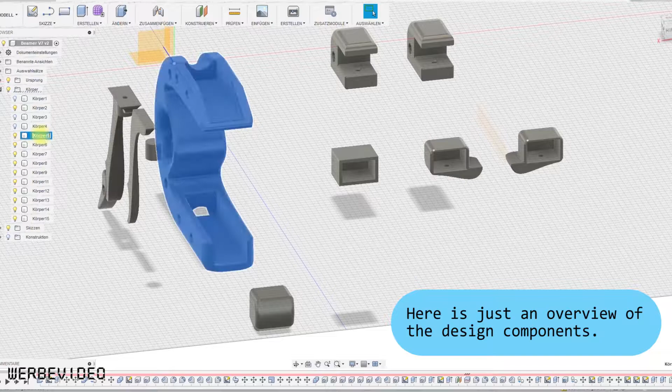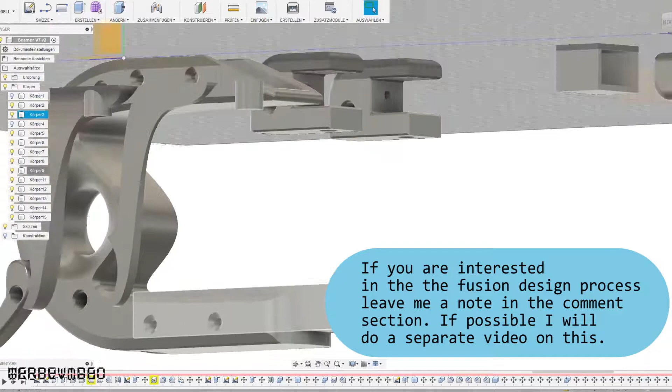As a design study, I chose a projector stand. The aim was to find a design that combines wooden elements and 3D printed components working together smoothly. In addition to functionality, I wanted to use an interesting shape. For the design of the workpiece I used Fusion 360, and for slicing, the software Cura 4.0.

I roughly sketched the design with a pencil and oriented myself to the dimensions of a typical projector. The design should not require too much space on an office desk. The stand for the projector should be pivotable and also as lightweight as possible.

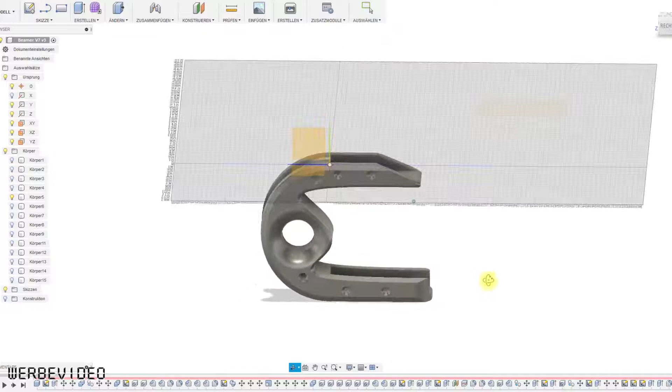For the wooden elements I used 18mm plywood, combined with 3D printed parts made of PLA and PETG.

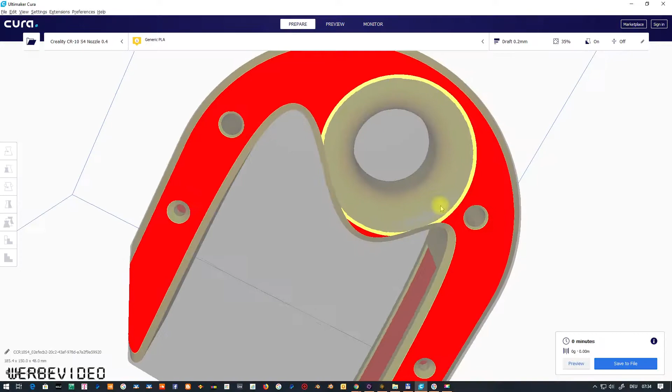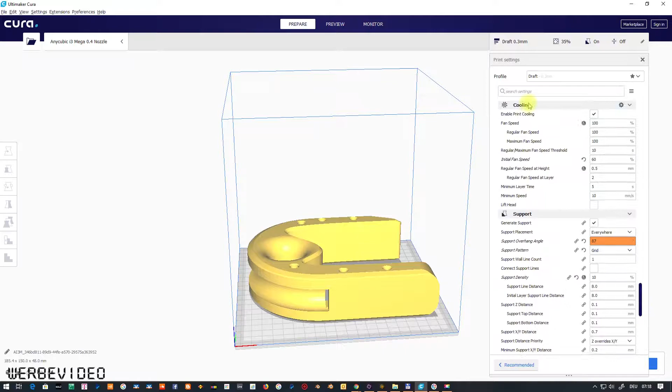The print with PETG requires a nozzle temperature of about 220 degrees Celsius and a bed temperature of around 80 degrees Celsius. But keep in mind, the settings can vary between filament producers.

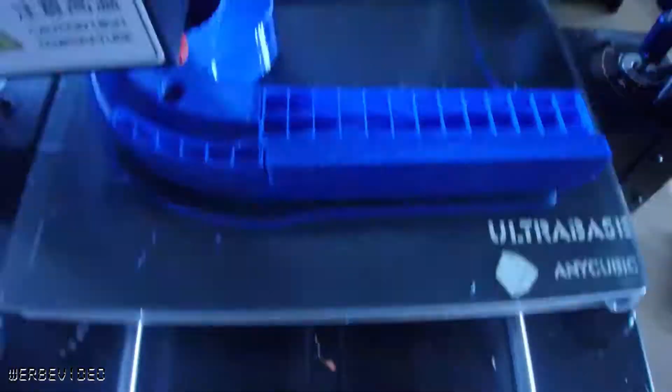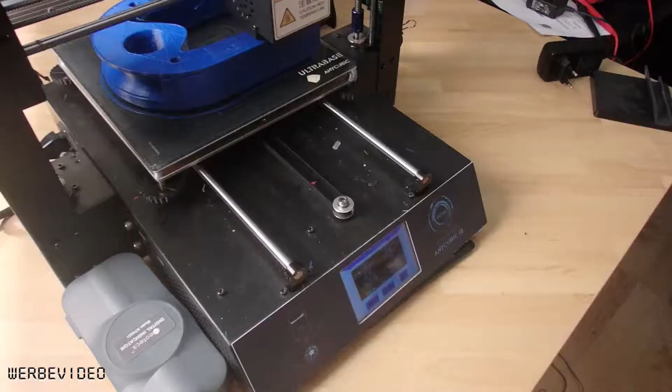To print PETG, I used the Anycubic i3 Mega, which is better suited for higher temperatures and has a smaller print bed. In order to find the correct temperature for my printer and the PETG filament I used, I previously printed a heat tower. As a result, the optimum temperature was between 220 and 225 degrees Celsius.

The PETG components printed in blue. For printing with PLA, I used black colored filament.

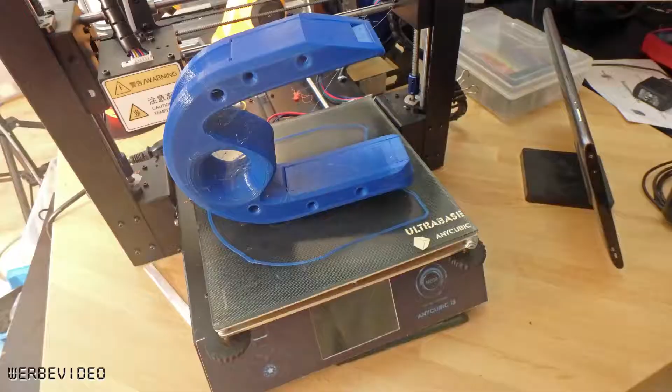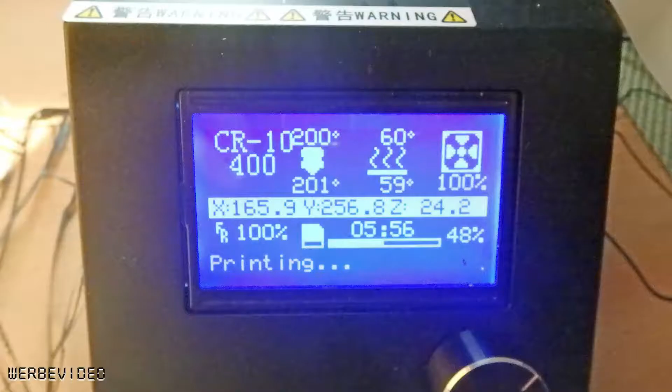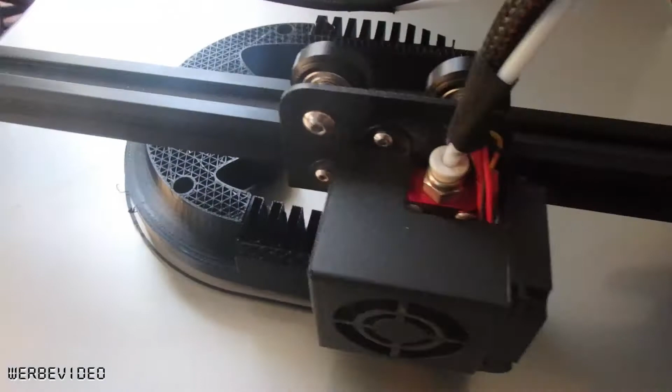The PLA is printed on my Creality CR10S4. This printer gives me very good results with PLA and can print big objects on its 40 by 40 centimeter sized bed. I selected a print temperature of around 200 degrees Celsius and a print bed temperature of 60 degrees. I will show the detailed settings in the video, so you can pause and have a look at my settings.

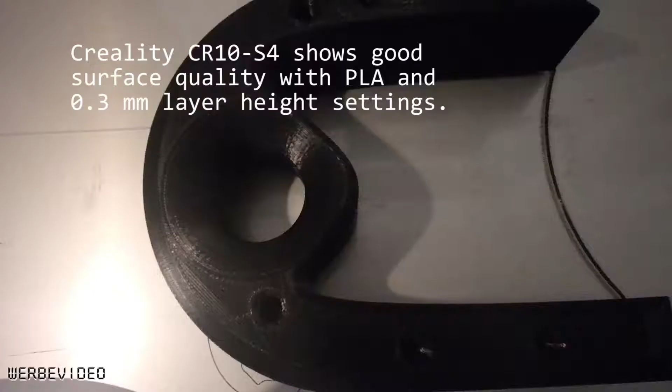On the Creality printer, I use a combination of glass plate with hairspray to make the print stick to the print bed.

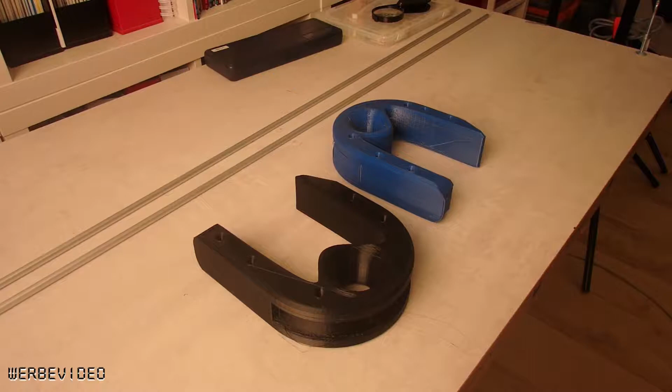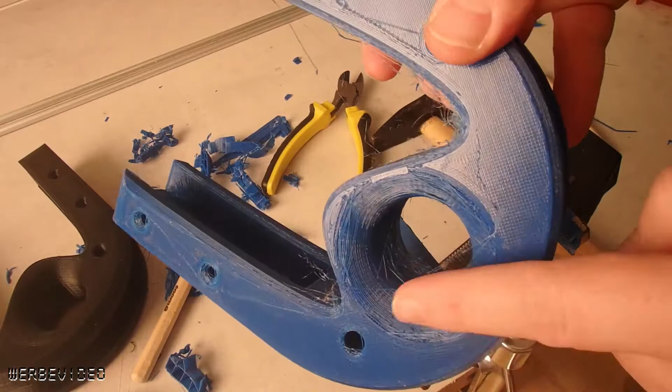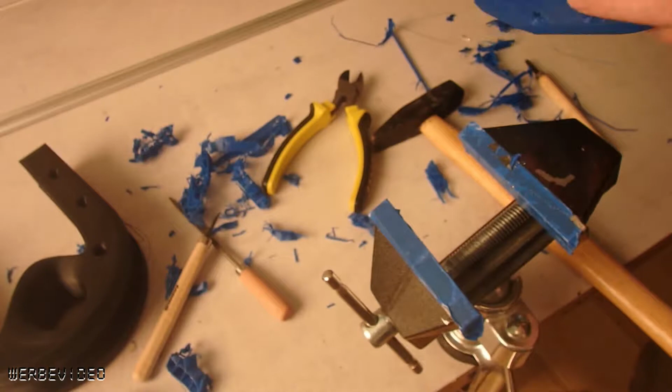In order to save some time for printing, I used a layer height of 0.3 millimeters. The print quality is slightly worse, particularly affecting overhangs. Since this is a design study, I accepted the poorer quality to print faster. Of course, a setting of 0.2 millimeters, or better 0.1 millimeter, would result in much better quality of the surface, particularly for the overhangs.

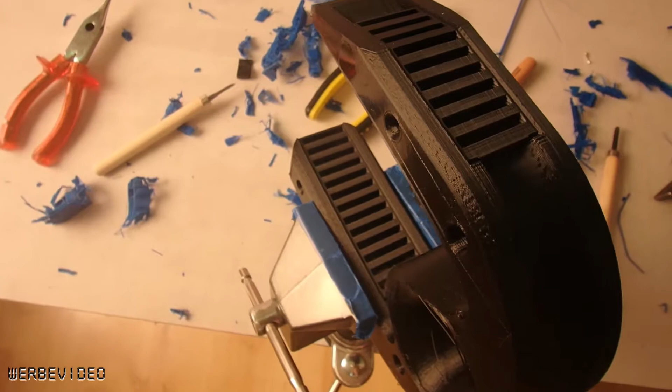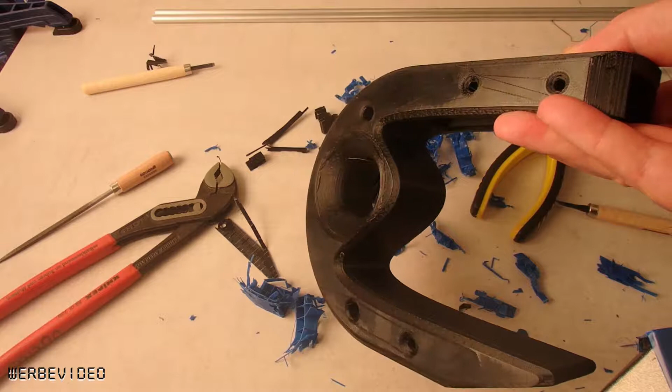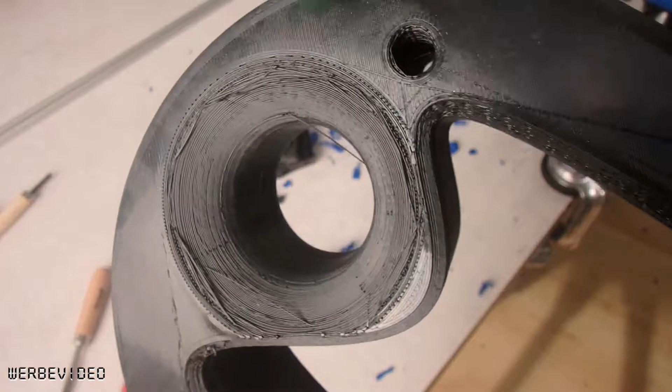Here you can see on the sides facing the print bed the slight or missing overlap of the layers. There are several possibilities to solve this. A: you can decrease the layer thickness to have less overhang between the layers and no print lines in the air. Or B: adjust the design and make the recess one-sided so there are no overhanging parts.

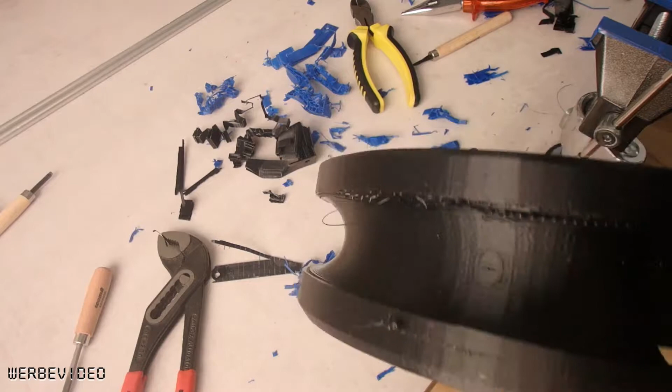And C: if I mirrored the finished model, I could take the less beautiful sides inside of the model so they are not visible from the outside. Of course, an additional surface treatment by grinding and the use of a filler and primer can create a very smooth and nice looking surface.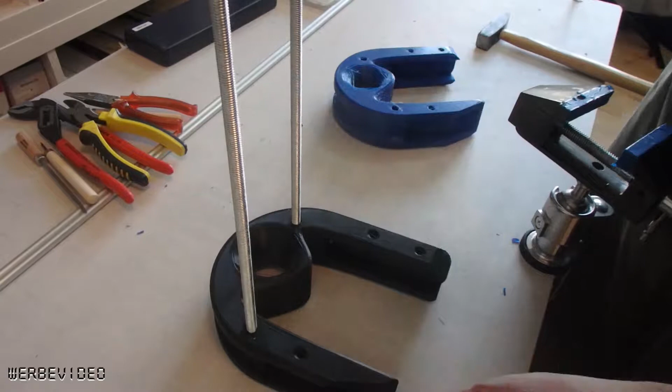Here I screw the parts together using a threaded rod and a screw on the inner side, and a self-locking screw on the outside.

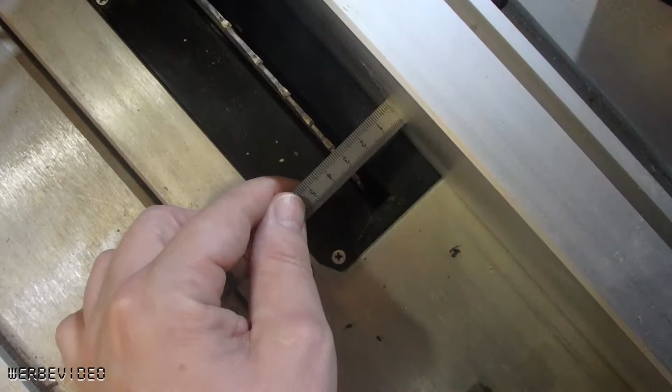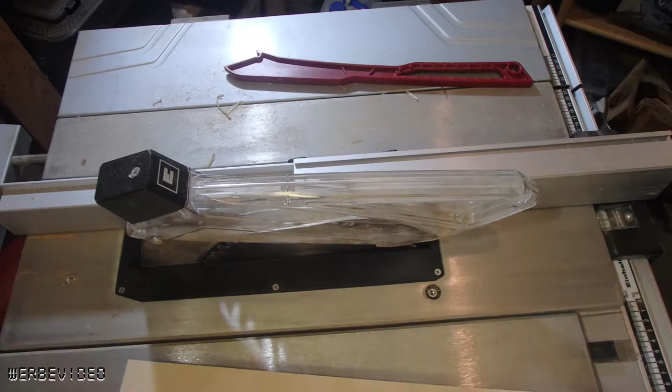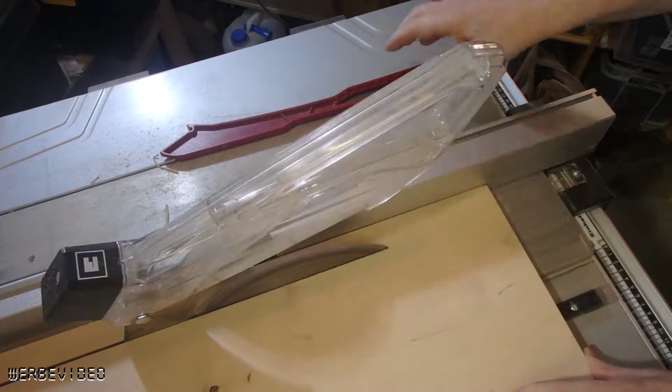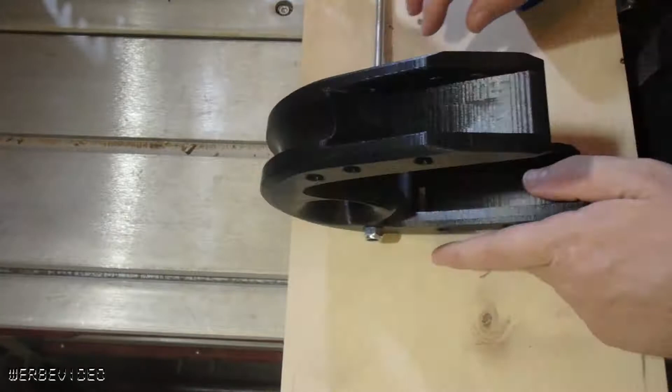Even with a coarse setting of 0.3 mm layer height, I got nice looking results printing PETG on the Anycubic i3 Mega. One reason is that I used a printing temperature in the upper range, in this case around 225 degrees Celsius.

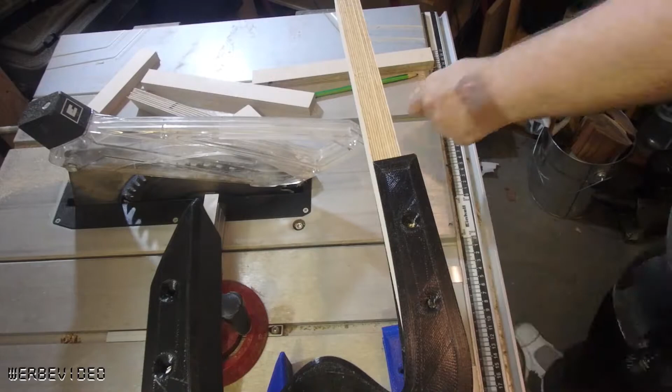In the future, I would like to use Fusion 360 to carry out an FEM analysis to find a solid shape and save unnecessary material at the same time.

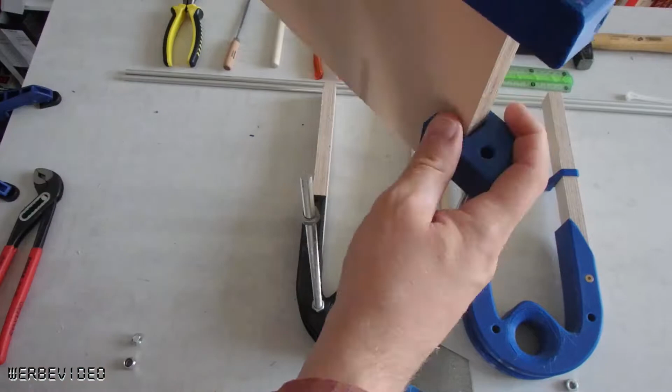And now the final assembly. I make sure everything fits and is good looking.

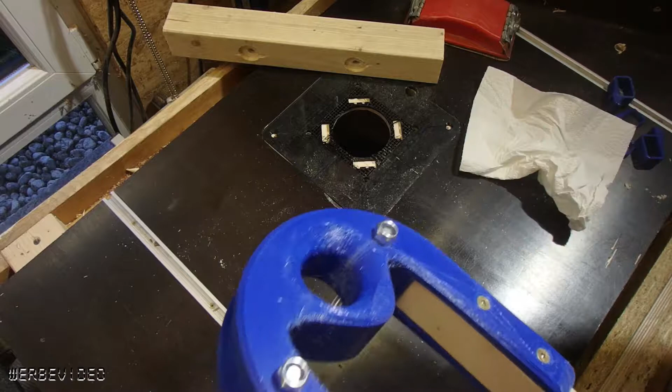Because I printed in the upper heat range, it came to a little bit of stringing. To get rid of it, I used a small gas lighter and burned the strings carefully until they were nearly gone.

I designed this small workpiece in advance to some bigger and more complex workpieces coming up in the future.

That's it for today. It was great fun designing and creating the case study. You will find some photo shots of the final projector stand at the end of the video. I hope you enjoyed it and I'm happy about the thumbs up.

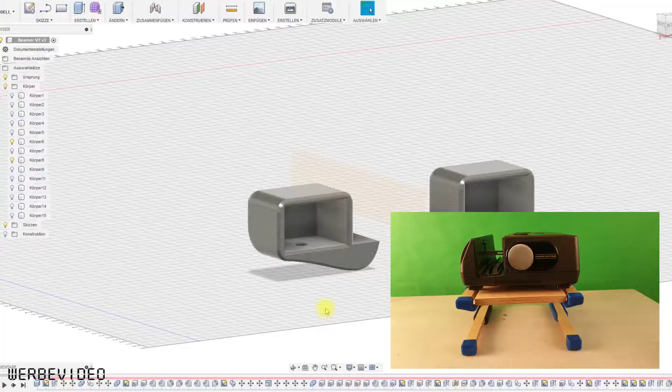The design of the workpiece with Fusion as well as the printing were very interesting for me, and I would like to do more videos in this subject area. I also like the connection with 3D printing and other DIY techniques.

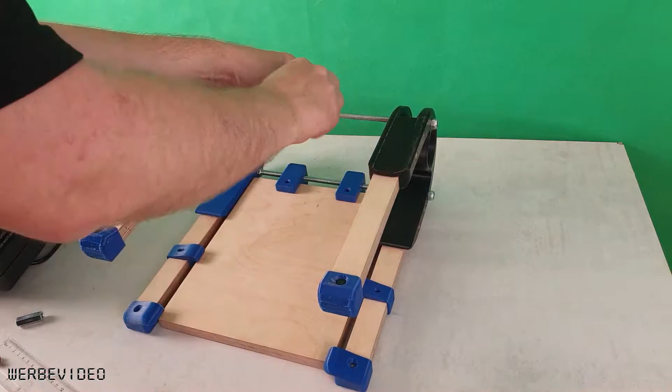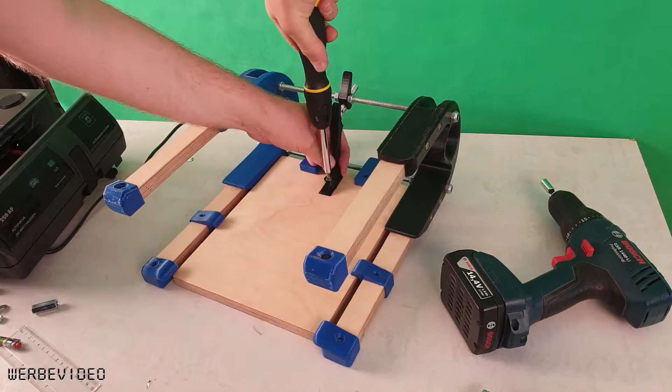The stand is intended for use with a small office projector. To do a stress test, I took an old slide projector, which is about 4 times as heavy, because it's good old analog technology. It was no wonder that the lever could not hold the weight.

So I strengthened the lever slightly.

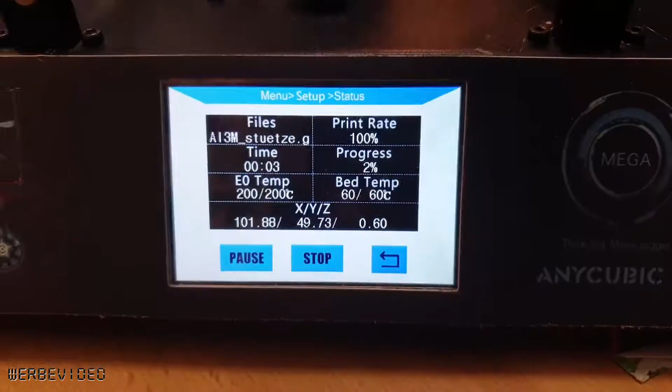In order to print the layers cross to the shear forces, I printed the lever lying down on the print bed, with the disadvantage that I now have to remove the support material, and the surface quality of the supported parts will be less good.